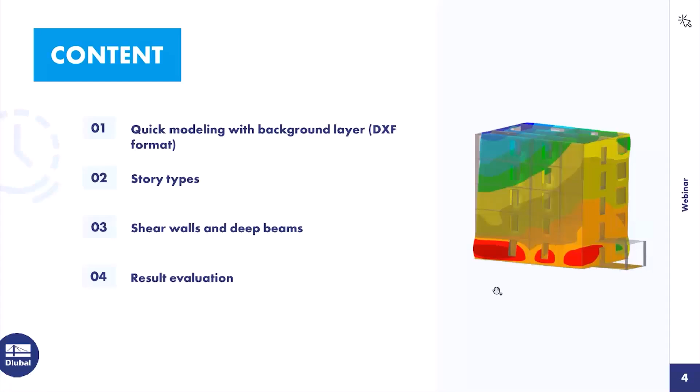Okay, then to our first chapter, the quick modeling, here with a background layer for an easier way. I will import a DXF file, and it's a modeling option from bird's view, floor plan, top view, however you want to call it. We have added this button in the building model add-on. It's an exclusive button, and you can see the objects you can generate or model in this bird's eye view.

And so then let's switch to RFEM6, then I can show you what I mean. I start a new model. Let's call it building model. And at first we must activate the add-ons, of course, the building model. And today also the concrete design, so that I can show you the configurations and special options which are connected with the building model add-on when the concrete add-on is activated.

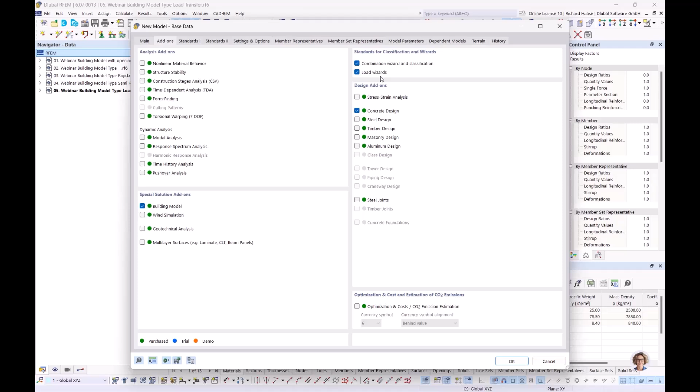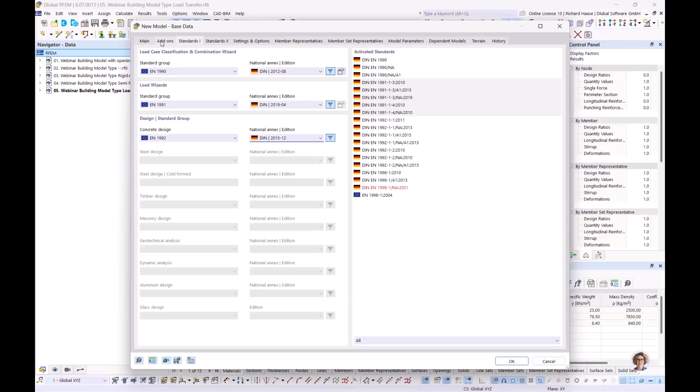And for the quick modeling, I also want to show you our load wizards. And for this today we want to choose the German annex. And okay, so when you activate the building model, automatically here under settings and options, our surface cells are activated, and this is a nice feature for surfaces which are, let's say, separated by lines or different parts, and you can control and modify the surface cells. But I will show you.

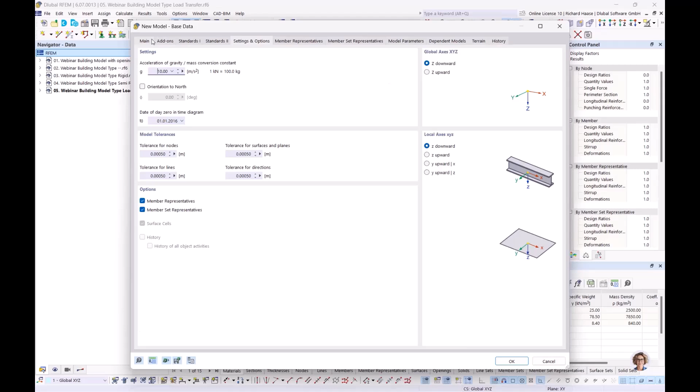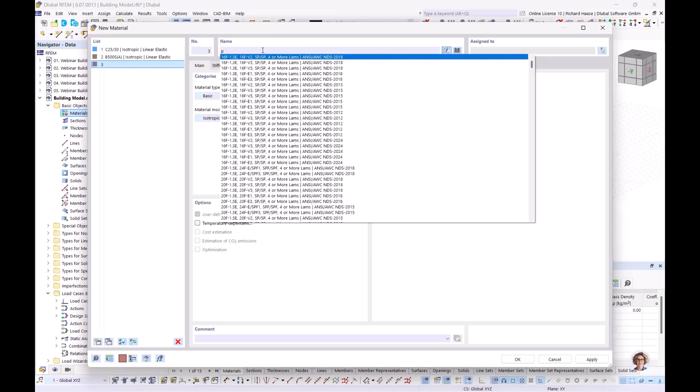So okay, then let's start with the new model. Let's delete all objects so that we really have a new model. Let's start with the materials. There I need concrete at first. Let's take C25/30. Then we need reinforcing steel. Let's take the B500. Okay, and also we need masonry. There, let's take this one. Okay, then we have defined our materials.

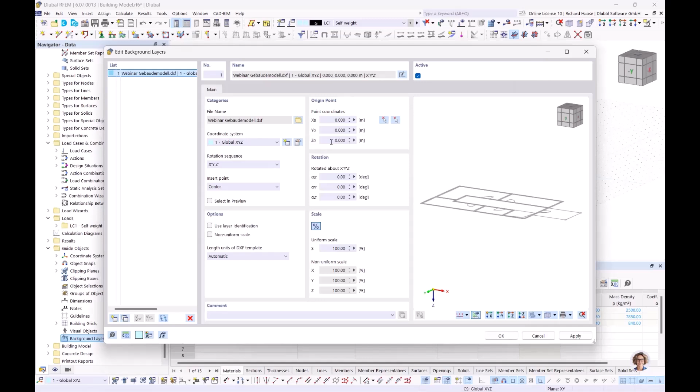And okay, then I will upload my DXF file, my background layer, so that I can show you what this building is about or how it looks like. Okay, and now we see it's nothing big. It's a simple model, but for this case it's good. Then let's change to meter.

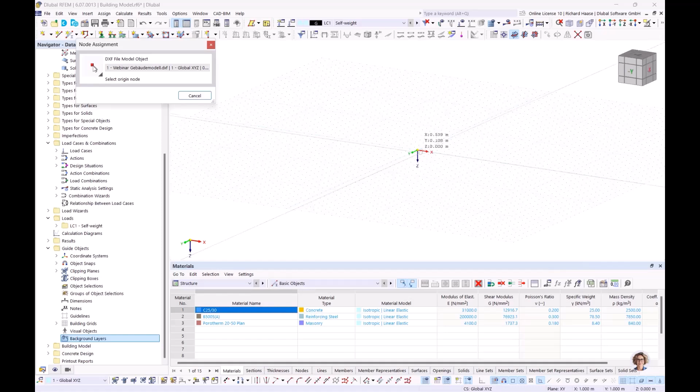And when you add some background layers, you have here two selecting points. The first you can choose, I will set it here to the zero point, and the second you can choose in your DXF file. I added here some statical system lines. I will choose this line for this. Okay.

Sorry. And now we have our DXF background layer, and the walls on the outside should be in masonry, and the inner side walls I will create in concrete. Also, this slab cantilever, not really cantilever, but it's only in the ground floor. And here we have some columns.

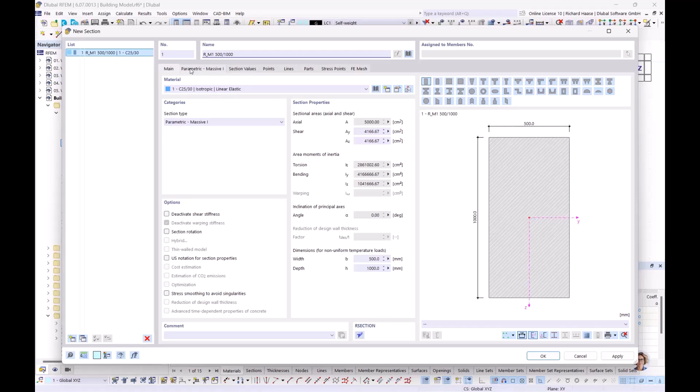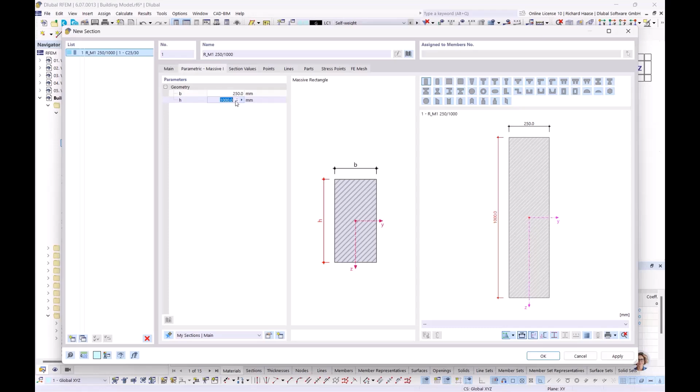And so then let's go back to our definitions at the beginning. So materials we have defined. Now let's define our section. For the column, it's concrete. And now I will show you also a nice feature. When you work with your DXF file, you have the option to measure the properties of the section. So let's take this. Okay, 25 centimeter, and also in the other side, also 25. Okay, then let's say okay.

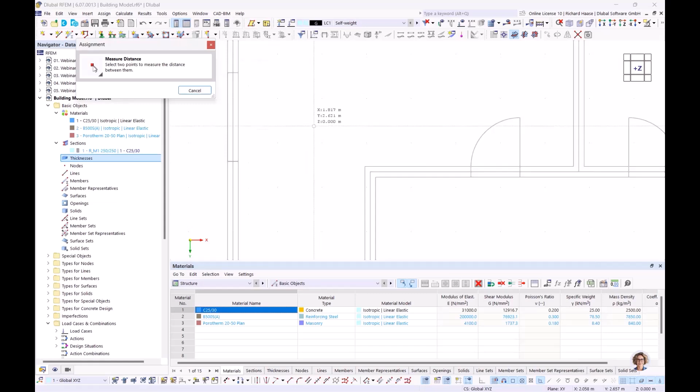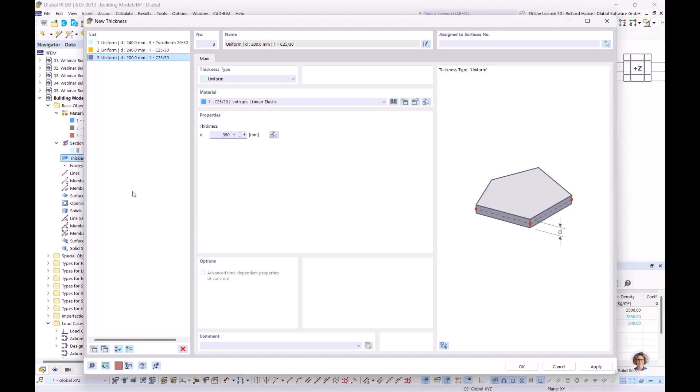And now we need some thicknesses. So maybe let's start with the masonry walls. Okay, and also we have here the same type. Okay, then let's choose this 24 for the walls on the inner side with the concrete material, and we can do here best way 24. And for the foundation plate, let's say we want to have a thickness of 35 centimeter. Okay, then let's say okay.

So we have defined the materials, the section, the thickness, and now we must jump to the Building Model add-on, and we will define now our building stories. Oh wait, okay, a new one with a height of 3 meters. And now again 4. You also can do modeling at first, but because of this fast modeling, you need to define the stories at first. And you can switch here, and now you see story heights here. And here are the floor modeling options, but I will show you at a later point.

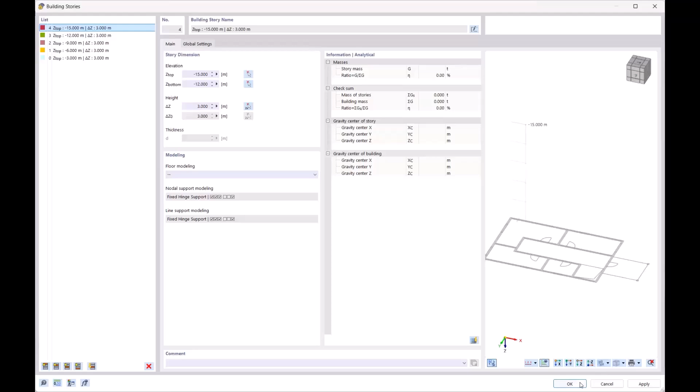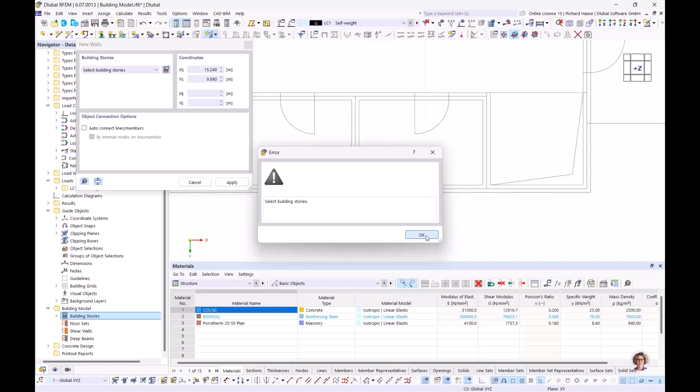So now we have our materials, our sections and thicknesses, and defined our stories. And now we can start with the fast modeling. So let's start with the walls. Let's take here our masonry material, and now we can... Oh, yeah, right. For this, you need to define the stories. So you can choose if you want these walls only on one floor or on different floors, or in our case, we want to have these walls in all stories, then apply, and let's start. Okay.

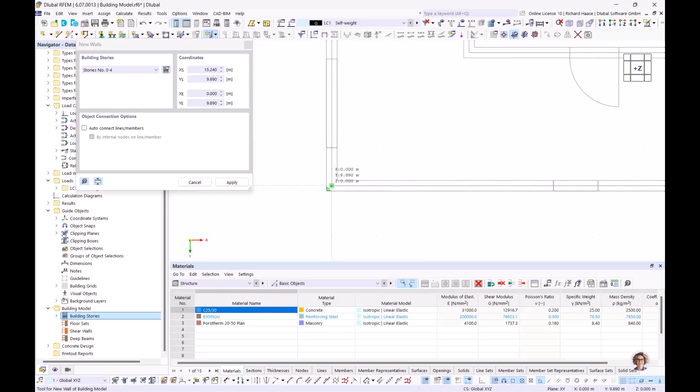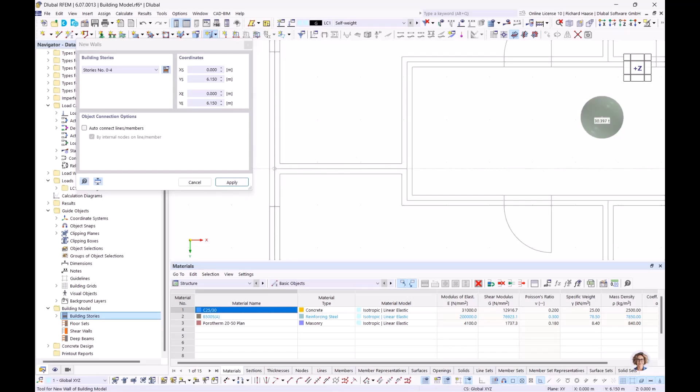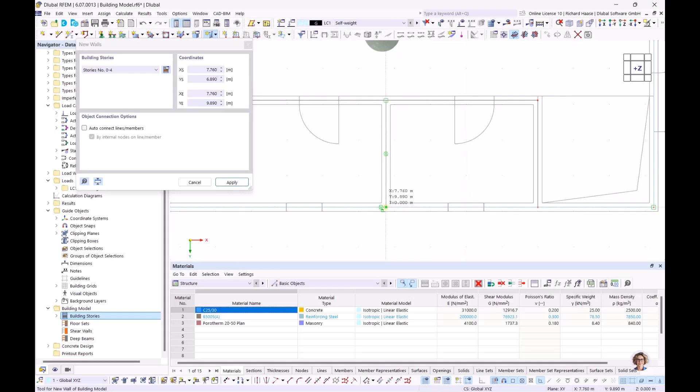Okay. So now you see here this mess, and it's also because of the Building Model add-on. The add-on now creates a center of mass, and now all these masonry walls are added with their mass, for each story. So you see now all outside walls are created, but let's continue with the inside walls. 24, yeah. Okay, here and here. Here and here. And the last one is here. Let's check if I got all walls. Yeah, it looks good.

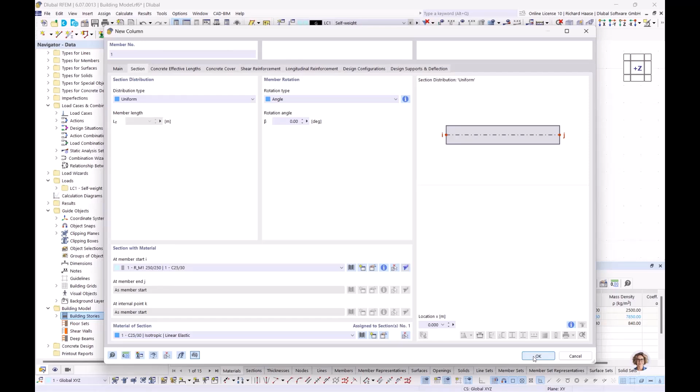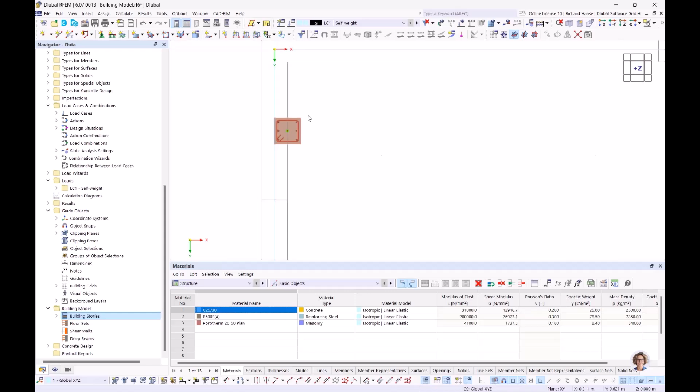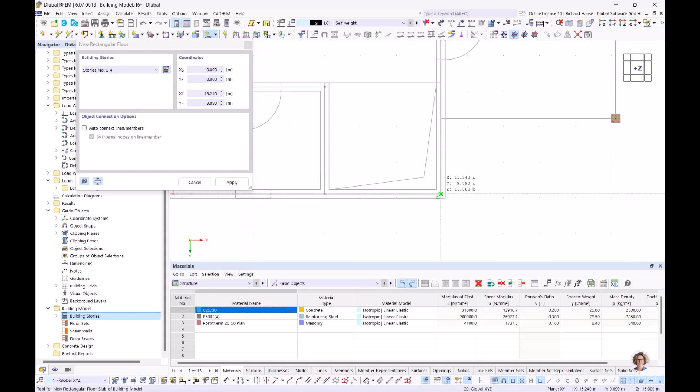Okay, then we want to define our columns with our section we have defined before. And now we don't want it in all stories, only in the ground floor. Say apply and click here and click there. Okay, then same procedure for the floors. So 25, and for all stories, apply. Oh, a moment, that's wrong. Okay, again, floor for all and apply. And okay, now we have also floors.

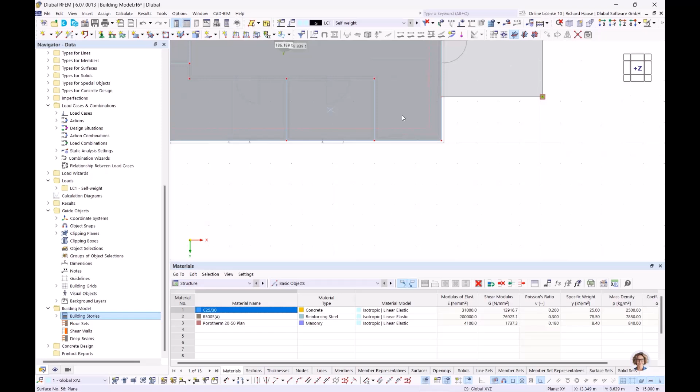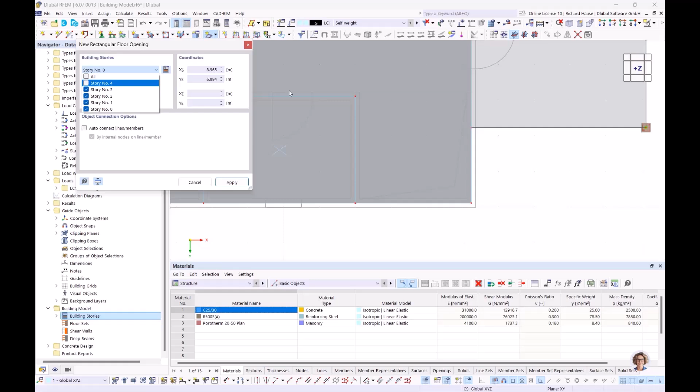Now we need this, I say, cantilever floor. Okay, also 25 and only in the ground floor. Let's start at this point. Okay. And here we have an opening for stairs. And let's define this floor opening. Here, let's see, not in the last floor. And okay.

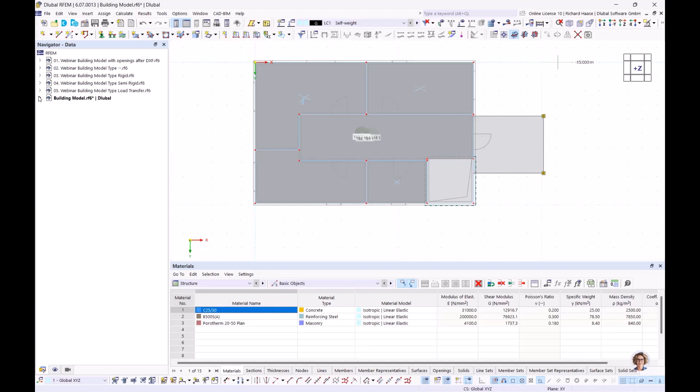Okay. So now we have our openings, and you see in a short time you generated a building. The only thing you must generate in a manual way are the openings, the windows and the doors, for example, or other openings in the building. And to not waste time, I have modeled this here. Maybe I can switch back to the full model, and there you see the openings.

And I added also some load transfer surfaces, because imagine when you define wind loads and you define them only on the masonry surfaces, these areas for a closed model are missing at the end, so you can define these load transfer surfaces, and these surfaces only transfer the loads to the sides, and don't have a stiffness effect or such thing, only for load transfer.

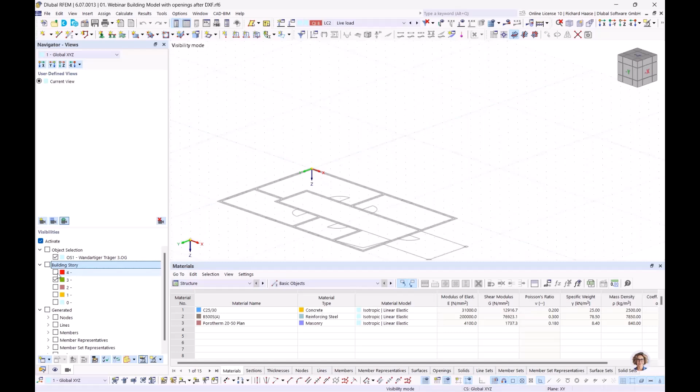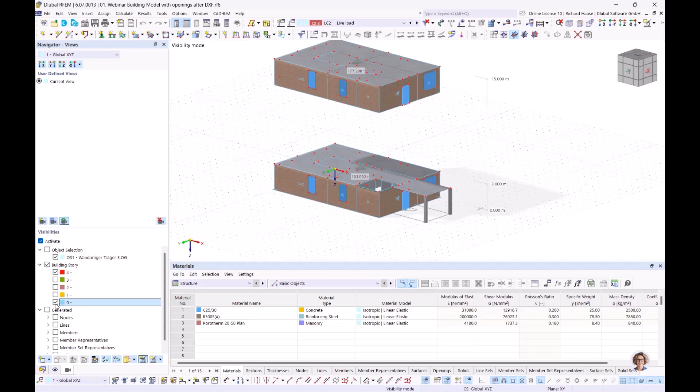Okay, then another nice feature which the Building Model makes automatically is in the navigator views. There is a point building story, and when you activate this, you see for every story you define there's automatically a view created, so you can quickly jump between the stories for loads and such things, and I find it's a very nice feature.

Okay, then what I want to show you also: for example here you see it's one big wall, and you see these blue crosses. Oh wait, maybe we change the view. Oh, it doesn't function how I wanted.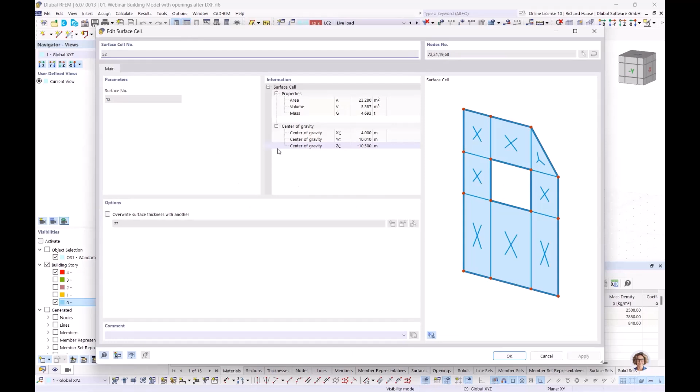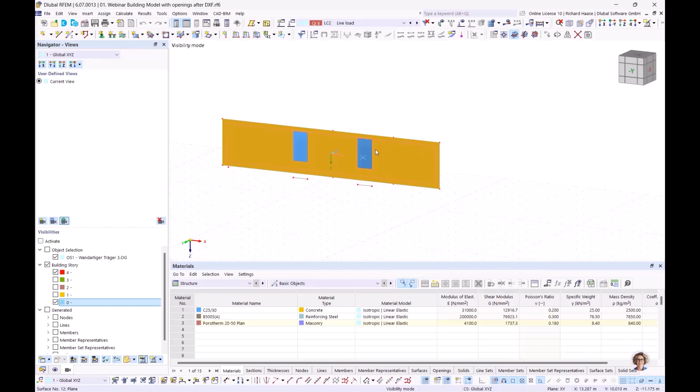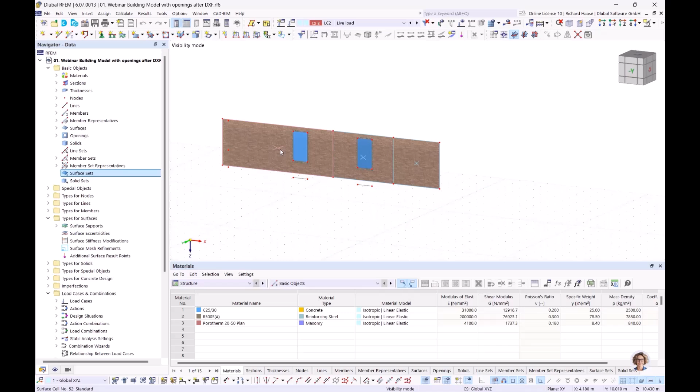Yeah, you have only one big surface, and with these surface cells you have the option, when you click on the surface cell, to give these cells other thicknesses. Then with the different thicknesses you can also design the surface as one surface, so it's nearly the same effect like with surface sets, but it's an easier and faster way to define this here.

Okay, then I want to show you the concrete design. When you activate the Building Model add-on and also the Concrete Design, you find in the configurations some additional points which are only possible with this add-on. Here are some options for the deep beams and for the shear walls. So that's now possible.

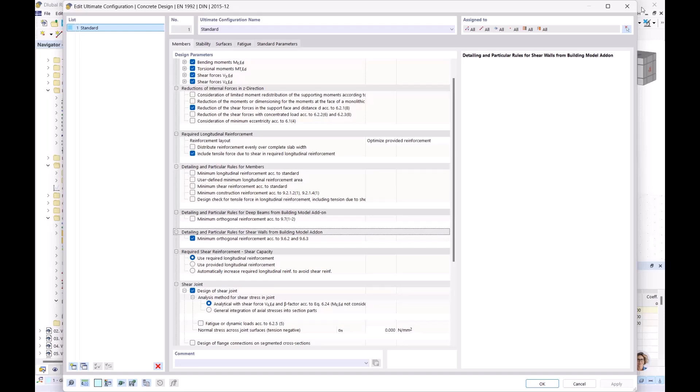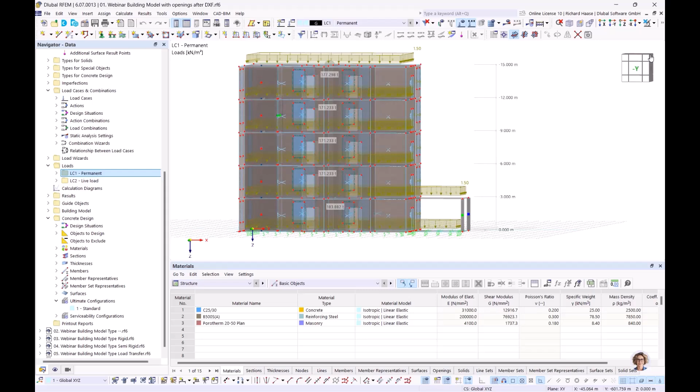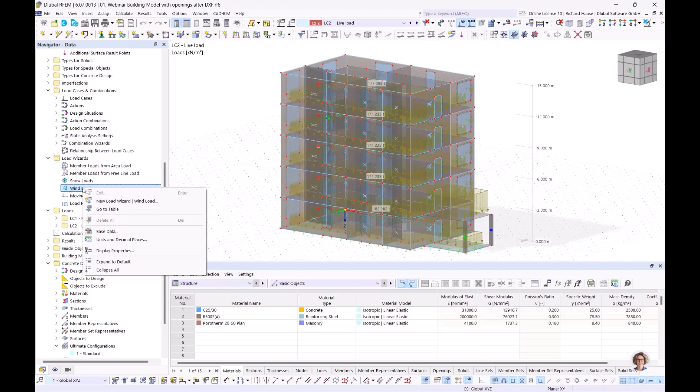Okay. Then, as I told you before, maybe we switch to the loads. Sorry. Here we have some permanent loads, nothing special, and here some live loads. And now I want to show you the easy way to design wind loads with our load wizard. We find this here, for example our wind loads, and so we have a flat roof, and now we want to find the base corners.

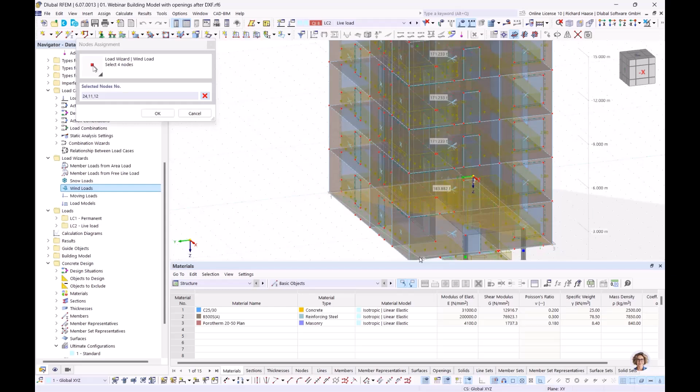Okay. And also the roof corners. Okay, and now you see all walls: RFEM automatically detects the needed walls and roofs. And another nice feature is the definition type with map and parameters.

That's why I switch to the German annex, because you need this national annex to select the location on the wind load map. So let's choose, for example, the headquarters of Dlubal. It's here in Tiefenbach, Am Zellweg 2.

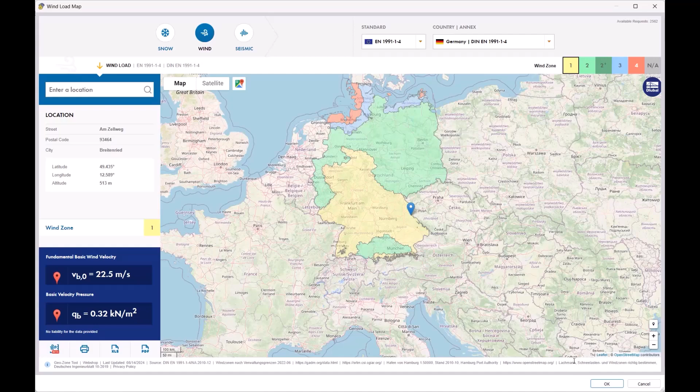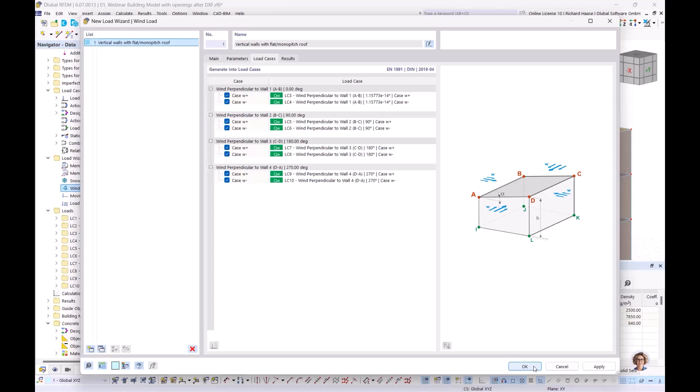Okay, let's say okay, and you see the program transfers information from these wind load maps: the terrain category, load zones, and all information for the wind loads. Also, you can automatically generate load cases per direction. Let's do this here with this button. And you see all directions. Okay. And now we have our wind loads generated fast and correctly for all directions. I find it's a very nice feature.

The same for snow loads, also with a connection to the Google Maps view. So with these load maps, the same procedure. And then for buildings, we have the snow and wind loads generated very fast. Okay, that's the points about the quick modeling. Then I will switch back to my PowerPoint presentation to the second point, the story types.

After definition of the stories, you have these 4 types. And what are these 4 types exactly? I will tell you now. But before that: independent of which type you choose, you get specific results for mass and story-by-story results. I will show you at the end of my webinar. So, let's start with the first type.

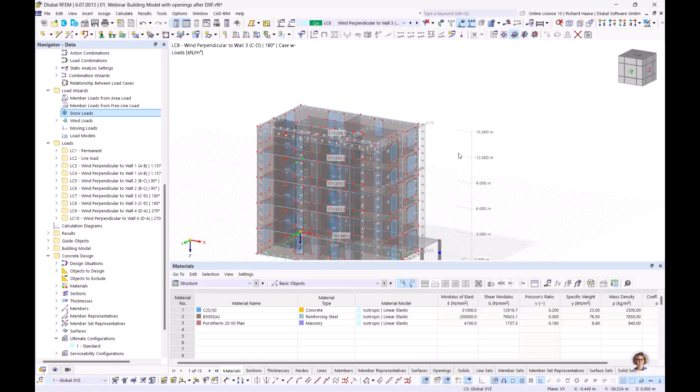So maybe for a better overview, I will close some. That was the beginning. Okay, I've saved it another way. Okay, now we have our 4 types. So let's start with our type load transfer, so that I can show you what is happening here.

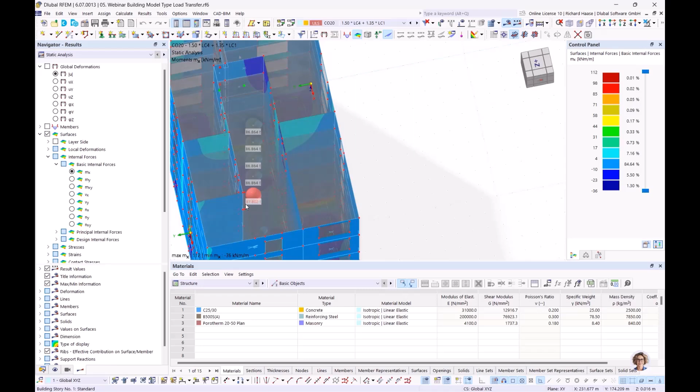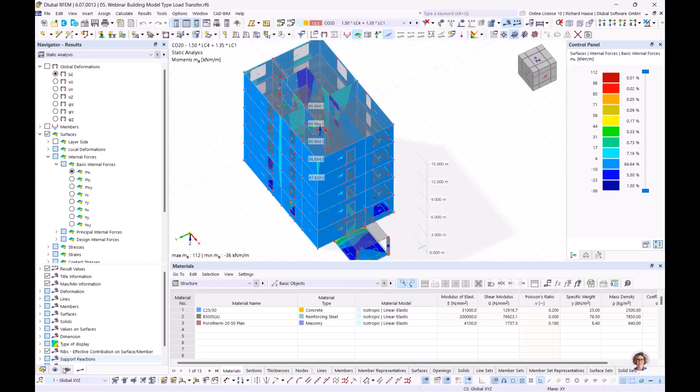Wait, that's correct. And so we want the static analysis, and for example, bending moments. And when you see here, we have no moments in the floors, no forces in the slabs, only forces in the walls. So here no slab is activated. So really a simple load transfer. And so then we can close this too.

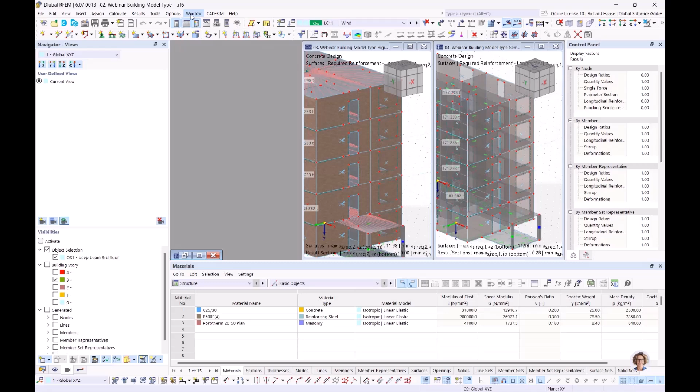And now let's compare this way. Moment, and maybe we can minimize this, and again here. So now we have our rigid type, and I choose the 3rd floor, and okay, we want to have the same overview for our semi-rigid, so that I can show you the differences directly. Okay, one moment. Why is it still activated? Okay, then let's choose a load case with wind and self-weight for both.

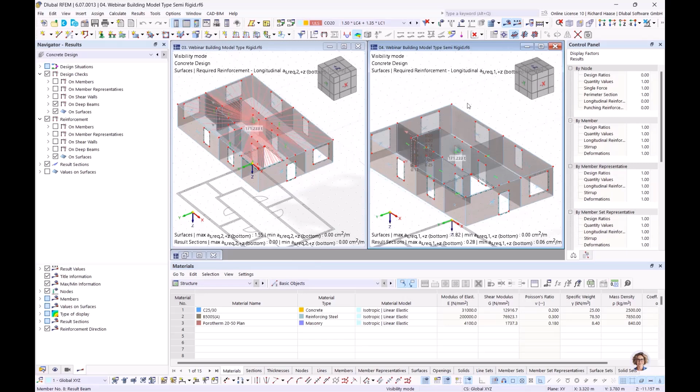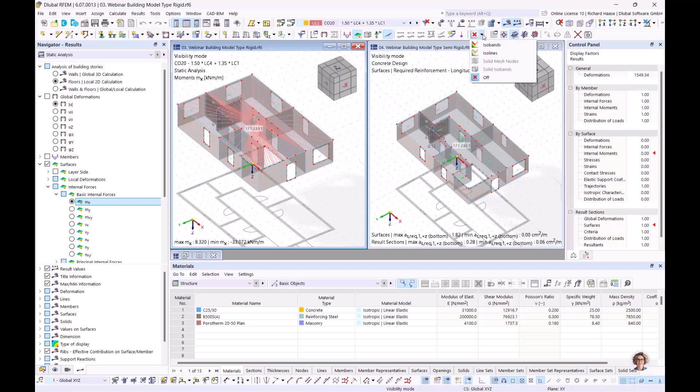Okay, so when we now switch to the static analysis, we have here an additional point, analysis of building stories, and this analysis of building stories is only possible with the type rigid diaphragm or semi-rigid diaphragm. So then maybe let's look at the floors first. Moment is okay. Let's switch to isobands.

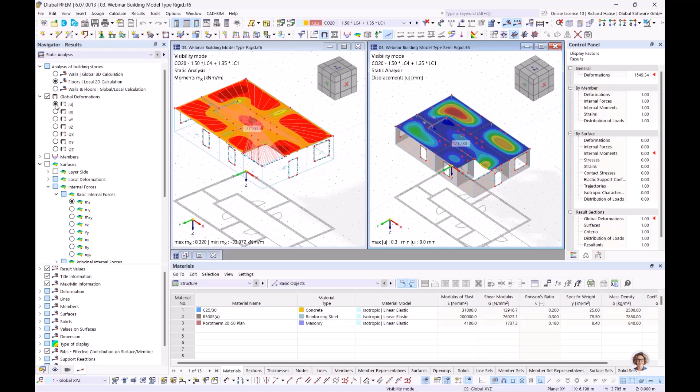And here we need also MX. Yeah, you see here between type rigid and semi-rigid there are no differences. It's exactly the same calculation. Also when we switch to deformations, for example, it's really exactly the same. And the difference is in the walls calculation. So when we look at our rigid type, maybe again in X,

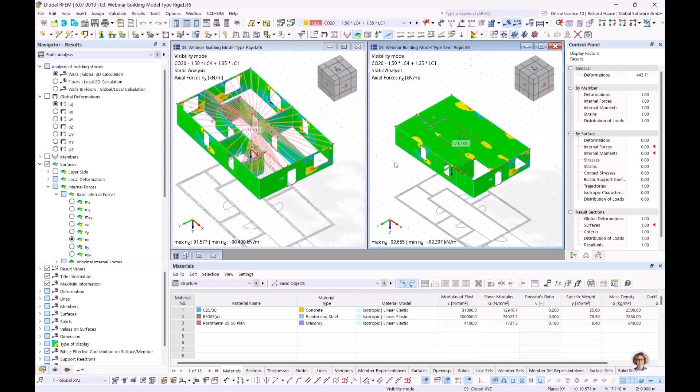and also nx. Yeah, you can see it here. In the rigid type, the slab is here with infinite stiffness and doesn't have an effect on the calculation of the walls. So the walls stand alone more. And here in the semi-rigid type, the slab also has an effect in the 3D calculation of the walls. So also for the deformations, you can see it here. Here we have only 1.8 because of the stiff slab, and here with this softer slab, through the real rigidity of the slab, we have a bigger deformation,

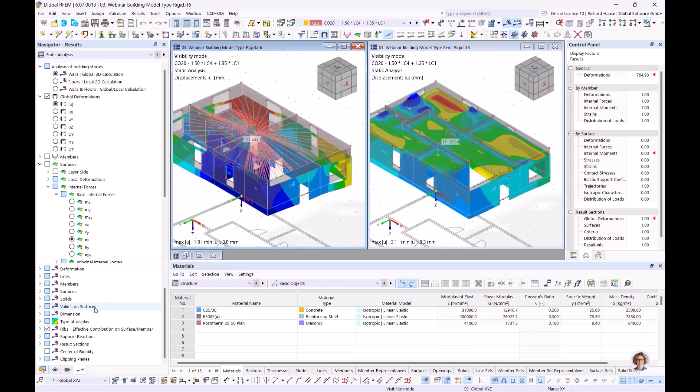and I call it the traditional structural analysis, so calculation with positions in statics, and you can see it. Let's activate the values on surfaces. Let's again switch to mx. Let's make it this way, we see it better. So the walls here have 0.238, and the floor 1.005, and these walls and floors are only a result of walls and floors separately.

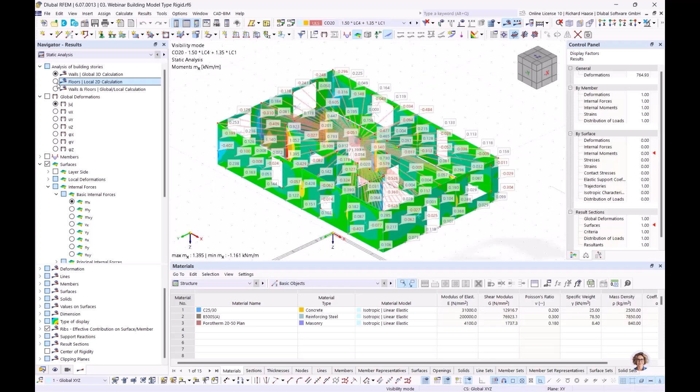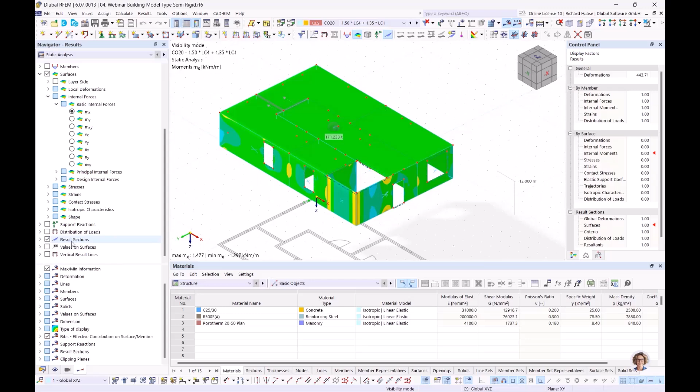So when we see it here, we have our 1.005 and here our 0.238. So you see it's independent, they're not affecting each other. So that's the rigid type. Then let's switch back to our semi-rigid. Let's go here maybe. So surface 5.8.

Here you see in the global deformations we see a difference. So we have here deformation 3.1 and here 0.3, and here it's a mix of both. So the results are working together, let's say in this way. And again here to rigid with the deformation. Sorry, this is a better way. So here we have for the walls 1.8 and for the floors 0.3, and this shows only the maximum of one of these, and it's exactly the 1.8. Okay.

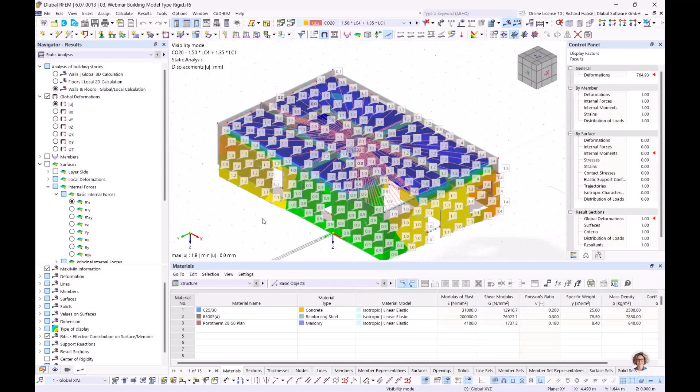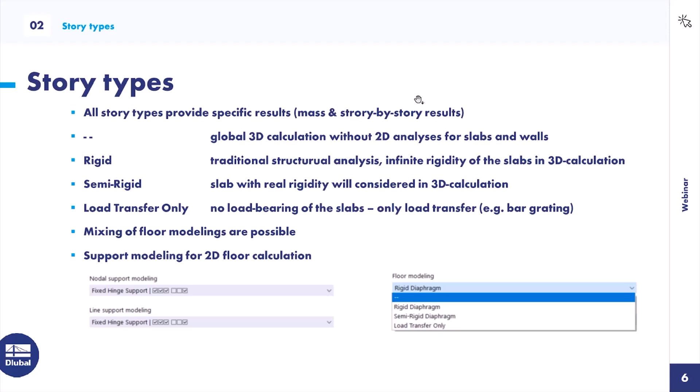That's it with this point. Then I will switch back to my PowerPoint presentation. The shear walls and the deep beams.

Both objects you must define manually. Choose the surface or surface cells, or also you can choose members to define these objects, these shear walls and deep beams. Both objects automatically generate a result beam, which is an integration of surface forces integrated to member forces.

You also have the option to generate result sections, and result sections create an intersection line, and on this line you can see results on this area, let's say.

Important for deep beams to consider nonlinear calculation, or the forces which come through this surface type. It's according to the ratio of height and length, and when this height to length ratio is smaller than 0.5, so when you have a really long beam or a long surface with a low height, then this result beam is perfect for this calculation. But when you have a height to length ratio bigger than 0.5, we say use result section to have a better, more realistic result for these effects.

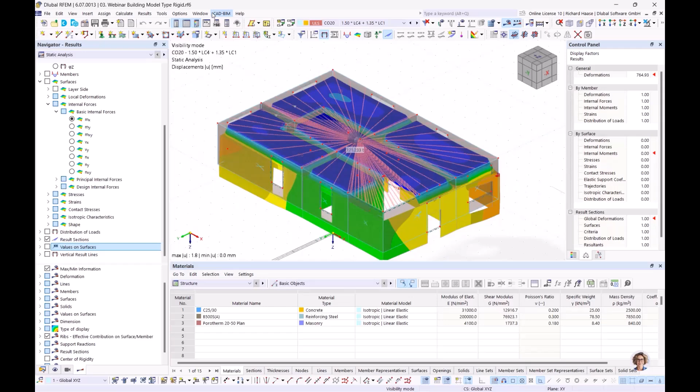Okay, then let's switch back to our RFEM model. I will work now with this type, and want to show you how you can define shear walls and deep beams.

I have modeled it before, but you can create a new shear wall, and you must assign objects. I have chosen surface and cells. Let's show you the shear wall.

That's a wall from the ground floor to the highest floor, and when you activate the design add-ons here, in this case concrete design, then you see here the typical tabs you can find also in every other concrete design object.

You can define shear reinforcement, longitudinal reinforcement, and all the other definitions.

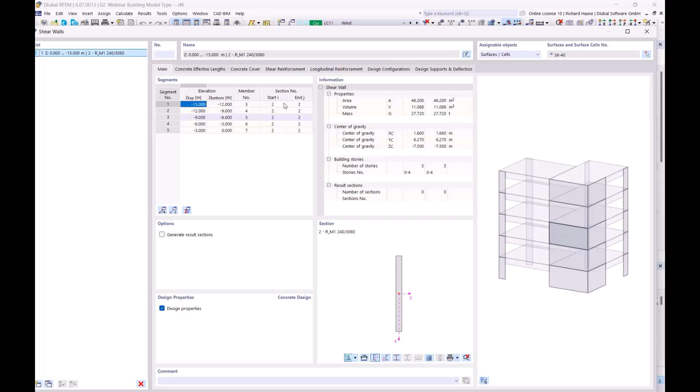Also, for the definition of the reinforcement, when it is a simple wall in this form, I'm not 100% sure, but for example some other simple geometries, it will also be possible to define your reinforcement. But when you have a complete individual form, it is not possible to create such reinforcement in RFEM6, but we have an option here with this button.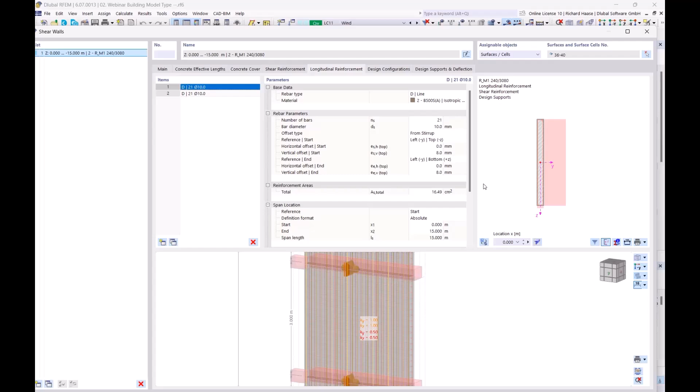You can open RSECTION, and RFEM exports your individual section to RSECTION. Then you can define the reinforcement you want and send it back directly to RFEM6, and it is actualized here, and then you can calculate it with your own defined reinforcement. That's a point I want to say.

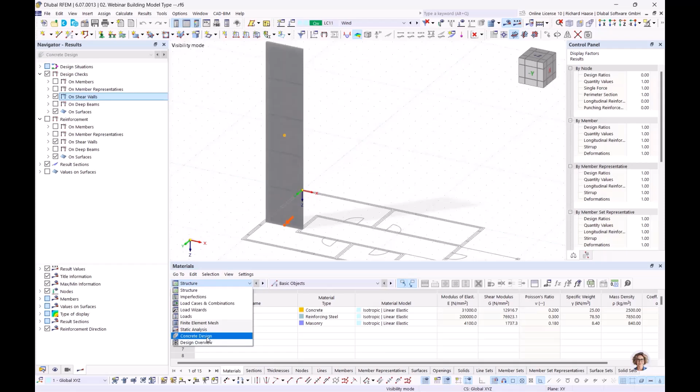Okay, we are in the concrete design, and you also see we have here additional object types, shear walls and deep beams, and also in our concrete design we have design ratios and reinforcement for shear walls and deep beams. So you can see here, like for other objects, calculations and the results for analyzing.

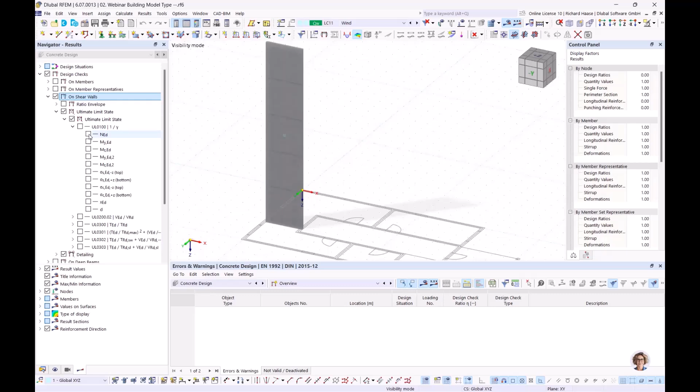Okay, but a big point for these shear walls, you guys also have it in the table, but I will show you in my next chapter. Here, for example, you see the axial forces which you get per story, and the moments, and yeah, it's very good for controlling and for seeing which forces are here.

Okay, then the same procedure for the deep beams. The deep beams you also can define like the shear walls, it's the same, and here I generate result sections because, as I told you before in the PDF presentation, the height to length ratio, you should look at this.

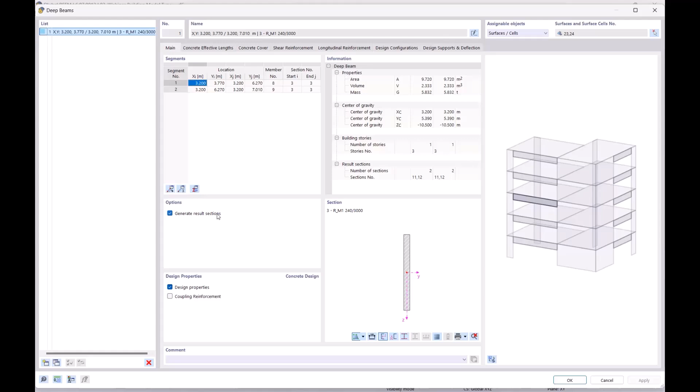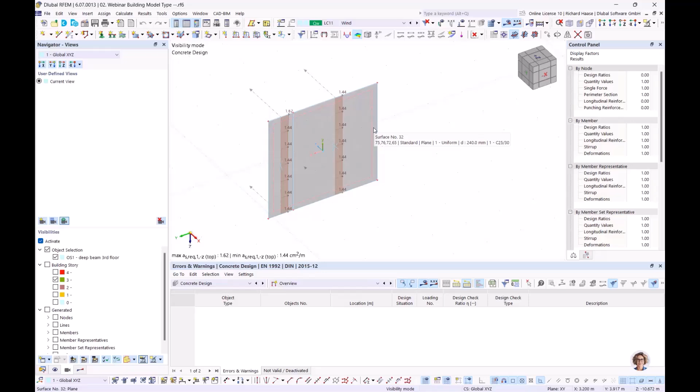And yeah, I want to show my deep beam. I have created my own object selection for this, and I have very little load, so this is only construction reinforcement. Normally you have more on the bottom side and so on, but I want to only show you the workflow, how you must work with this, or with these results.

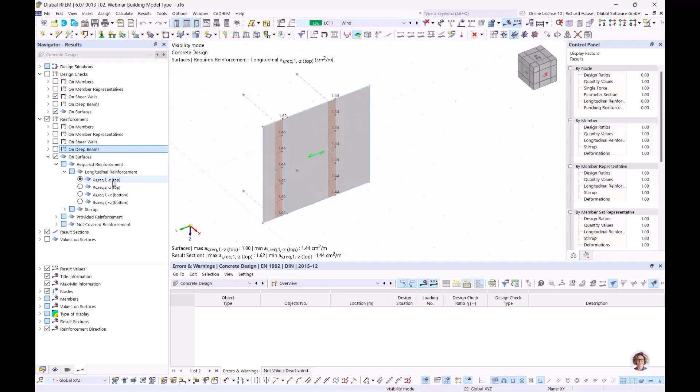Okay, so when we look at the reinforcement on our deep beams - no, sorry, we need a surface, of course, because the deep beam here is our result beam, but because of the height to length ratio, we must do it over the surface with result sections. You see in this direction it shows the required reinforcement on the bottom side, where you have this steel tension, what you need. So let's remember it's the one direction, and the second direction is for the shear reinforcement.

So when we look at our result diagrams, let's remove all and go to here 11.

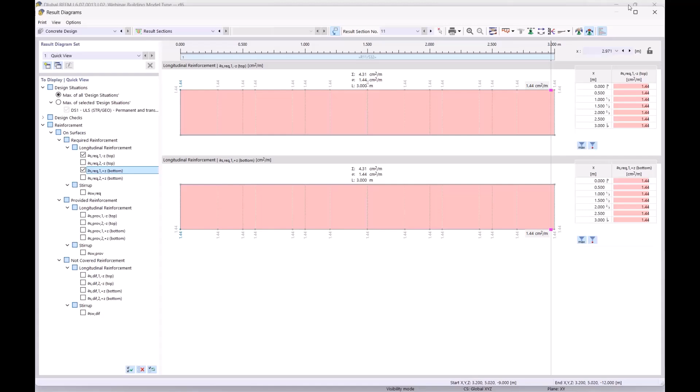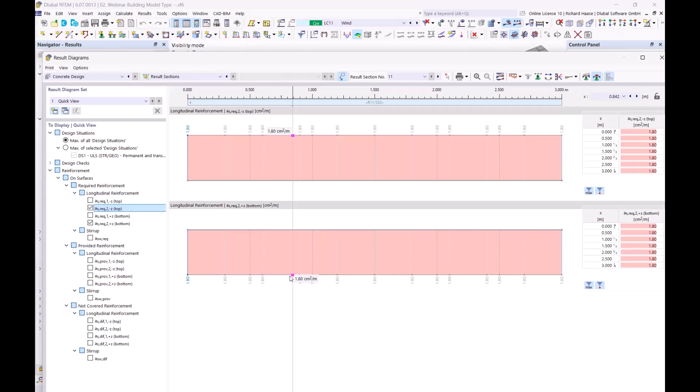Then we have these results here. Now we must define a smooth range over the whole length, so we have 3 meter constant, and now we have our result. We need this 4.31 plus 4.31, so we have a sum of 8.62, which we must put into the bottom side of the deep beam. For the shear reinforcement, we look at both directions, top and bottom, and choose the maximum value. Here it's the same because we don't have big loads, so we must choose 1.8 for the shear reinforcement. That's the workflow we have at this time.

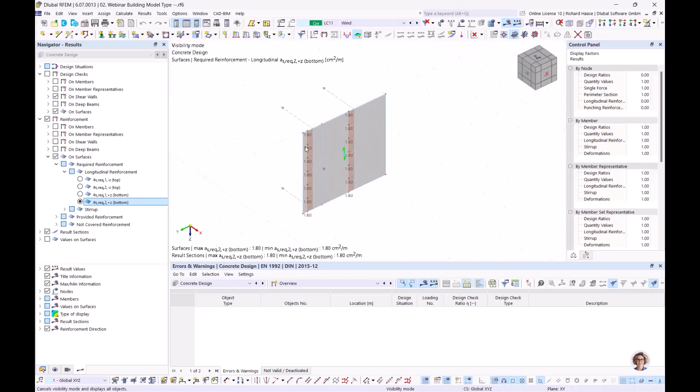Okay, that was about shear walls and deep beams. Let's cancel this visibility, and let's switch back to the PowerPoint presentation, to the last chapter, the result evaluation.

When you click the static analysis, you have this point, results by stories, and you have these 5 tabs: the center of mass and rigidity, story actions, interstory drifts, forces in deep beams and shear walls. Maybe it's easier if I show you on the program.

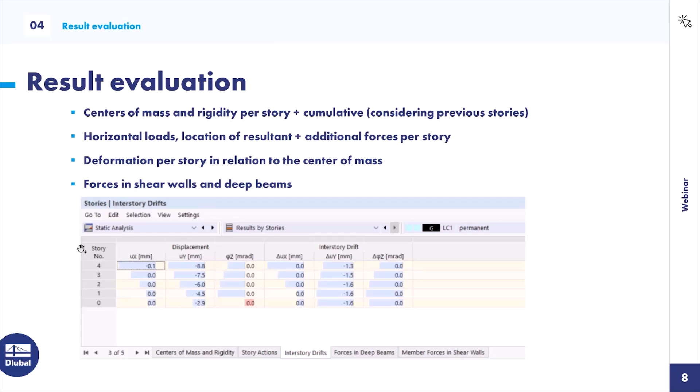So let's switch again to RFEM6, and let's go to the static analysis and results by stories. Let's start with the first tab, the center of mass and rigidity.

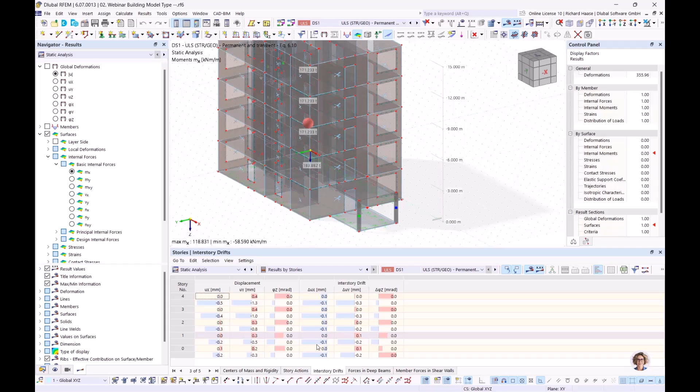Okay, then we have the interstory drifts. It's hard to see here because we have such low loads and a real stiff building, but you can see here the displacement in the X and Y directions, and if you have more loads, a very good view of the influence of every story, and the deformations per story.

Also here about the deep beams and shear walls, you can see the results of the result beams which are created for the deep beams and shear walls, and you can see all forces which are there in each story. For example, here the axial forces, you see how it grows every story, which is what I showed you before in the graphic menu.